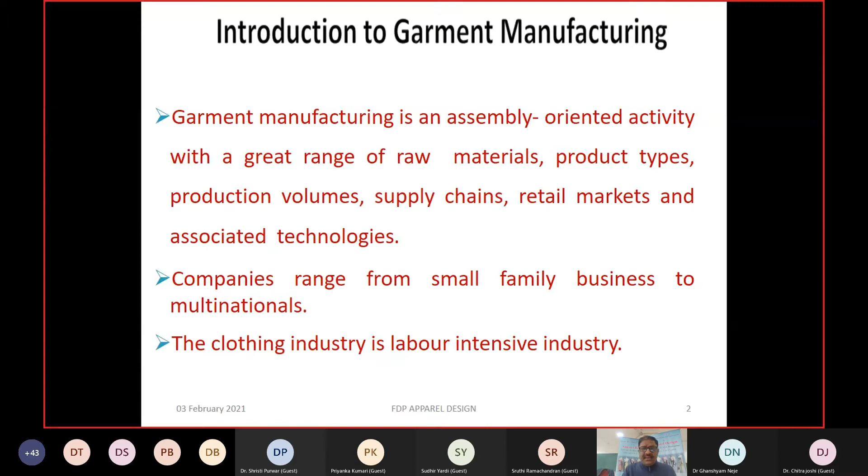So what is the quality network needed for the production of garments? First we need planning, meaning production planning and control - planning the production and setting objectives and improvement plans.

Then you implement all the planning, establishing world-class practices and technology for production. Checking means keeping control points and inspection points during manufacturing - this is the monitoring of the product. Based on this experience, especially inspection and quality checking and assurance, you get feedback from this section.

Accordingly you take corrective action - this is called ACT. ACT is the remedial approach for any faults generated in the undesirable products or manufacturing steps going on. So you keep an eye on all the manufacturing processes. Planning, implementing, checking, and applying corrective action - these are the 4 arms of this quality assurance network.

Now let's come to the quality objective. What should be the quality objective? What would be the quality objectives to follow during manufacturing?

Meeting your specifications is first - quality is already defined by your merchandiser, your consumer, your customer, your purchaser. So first you decide the quality, and this depends on the quality given by your buyer, your user, your brand. Then consistent quality must always be produced - reproducible quality as per the quality given by your consumers.

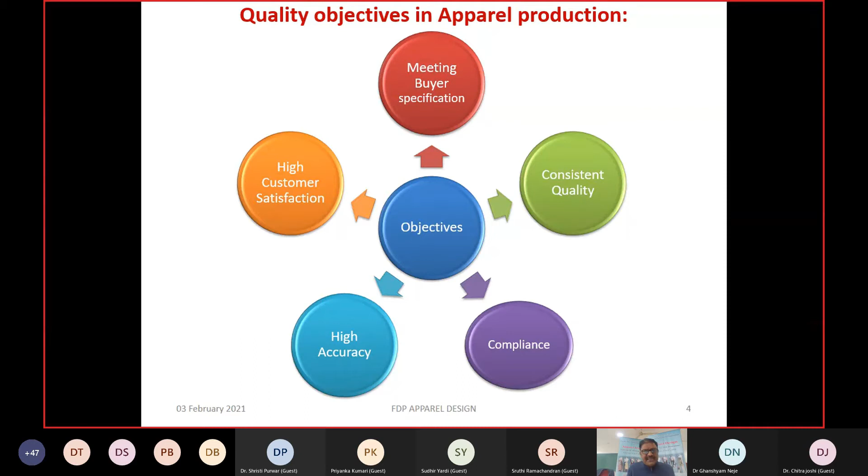So that is a very significant approach - especially how you provide more and more satisfaction to your consumer, to your users.

Quality assurance principle: first is fit for the purpose, meaning totally 100% perfect as per the requirement, as per the desired property, as per the requirement of the consumers - suitable for intended purpose. Suppose the consumer purchases the garment for some specific use, it must perfectly, 100%, fulfill that intended purpose.

Second is right first time - repetition of the work should be avoided. Right first time means the work should not be repetitive during production. It means you always prefer the appropriate and right approach toward quality assurance.

So what is quality? Quality has been defined by so many researchers, scientists and professionals. But in garments you will find one part is design and another is the properties of the product. Design is the aesthetic approach of the product, and properties is the engineering approach - both together make the perfect product.

One is design, meaning aesthetics, which satisfies psychological comfort, and properties of the product which satisfy physiological comfort. The consumer always needs that it looks good and at the same time provides all the required properties.

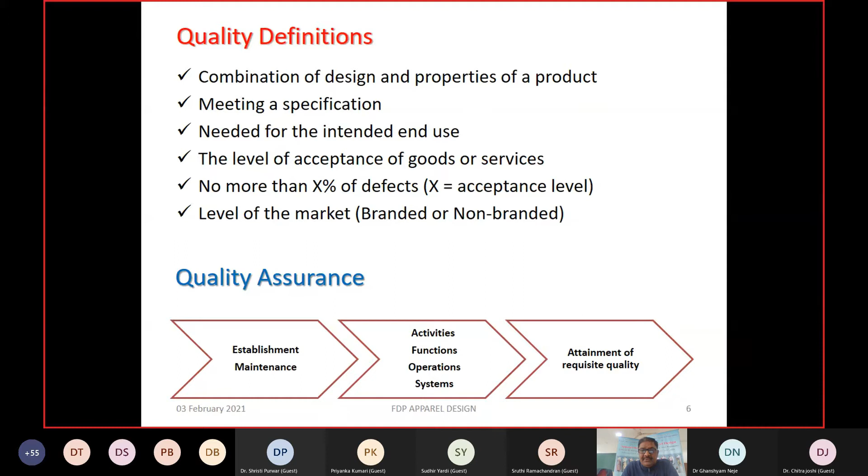So next is quality control. What is the role of quality control during production, during designing, during every activity of the garments? It is the system required for programming and coordinating.

Quality control basically depends on these programs. What would be the programs? What is your plan? This programming means the plan of your production. That's why the role of PPC, production planning control, is very significant in the garment industries. Always qualified and good people are hired for this PPC work.

Coordination between the cutting room, sewing room, finishing room, and dispatch, and with merchandiser, buyer, and seller - every coordination is required in order to reduce the lead time, reduce the cost, and maintain the quality.

So these are efforts of the various groups in an organization - the group work. All the people involved in various groups need to give maximum output while keeping coordination between all the groups. That will give a benefit to the organization and to the manufacturer in order to meet the quality and reduce the cost of the product.

So quality assurance serves as an agent to establish reliability. What would be the reliability of all your quality controls? What are the inputs? What corrective actions are you taking, and what are the results of that corrective action on the quality of the product? That is called reliability, and this reliability depends on your managerial skill, the skill of the labor, and the machinery used during production.

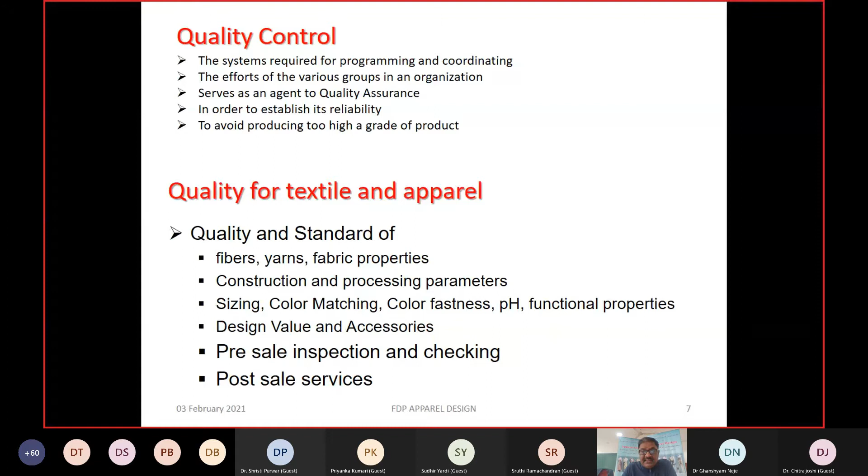All these are the policies of how to sell, how to enhance the sales of any product by any manufacturer. So, coming to the next slide, textile process sequence.

This slide provides basic information for non-textile people who have very little exposure to the manufacturing of textile materials. Fiber goes for spinning, making yarns, and yarn goes for weaving and knitting, making fabrics. The fabric then goes for processing, chemical processing, and then the final fabric is ready for garments.

With the help of suitable design, suitable fabric, suitable patterns, and desired trims - zippers, buttons, lining material, interlining materials, and other fusibles - suitable means desired or required trims, fabric, design, and patterns. All these four parameters make it possible to produce a complete, good quality garment.

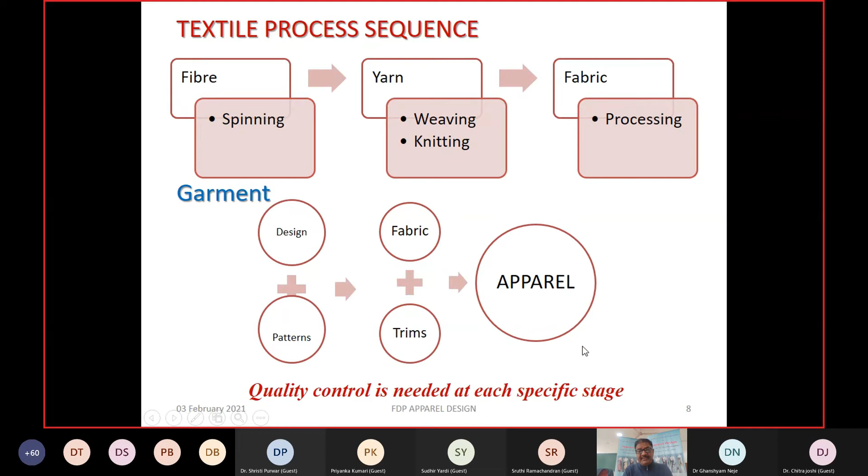Quality control is needed at each and every stage - the designing stage, the fabric stage, meaning good quality fabrics always give a good input to good quality apparel. Patterns mean good patterns, even patterns, and patterns as per the size of the garment. Trims mean good quality zippers, buttons, sewing thread, interlining material, tapes, and packing materials - good quality for every part of the garment. All these four inputs give an impact on the quality of apparel, so QC is needed at each and every stage of manufacturing.

This is also helpful to textile people, in contrast to the previous slide which was helpful to people with less exposure to apparel manufacturing. This is the production fabrication details of apparel.

There are two arms: one is planning, which is very significant in garment production, and at the same time quality assurance, keeping an eye on the whole production line. Planning is so significant because each and every lot is different from the previous lot - new design, new garment, new material is taken into account for production.

What machinery should be used for cutting the new fabric? What machinery should be used for stitching? What finishes should be used for the new product? This planning is needed for each different product and each different lot - every time we need separate planning for a separate product.

So PPC, production planning and control, is a very vital aspect of garment manufacturing, in order to maintain good quality garments. Accordingly, you design the work station, the methodology, time study, motion study, and everything.

That's why some companies recruit industrial engineers in the domain of garment manufacturing. They don't have an idea about the material, they don't have an idea about the quality of the apparel - they only have an idea about the planning.

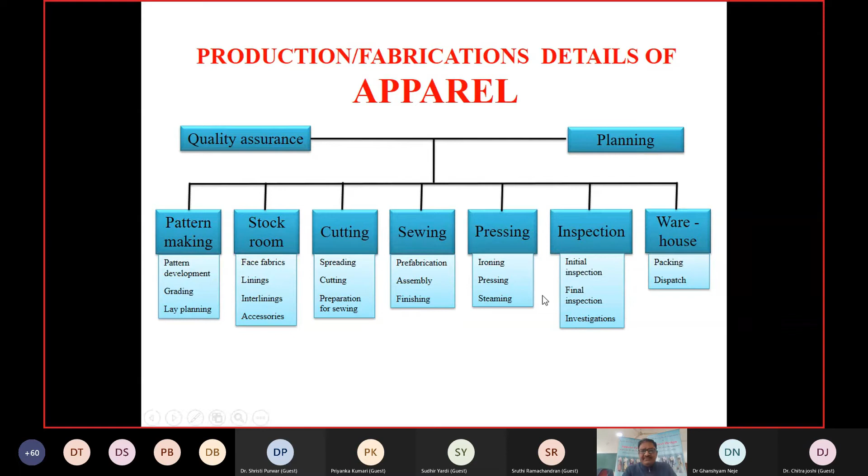Fabrication, joining - so anyway, this is the finishing. All these are the finishing operations.

Now to see the steps of this design: sketch, pattern, sample making, production pattern. Production pattern means pattern made for the production, actual size of the patterns. This will be used for the marking, and on the basis of that you cut the fabrics. Then grading, that is the step up and step down of the size.

This is done in order to avoid altering any aesthetics and design of the garments. So grading is a process of increasing the size - larger size and smaller size.

This is the marker planning. This facilitates this process of cutting, and also reduces the wastage. Spreading, that is making layers of the fabrics, and on top of the layers you put this marker planning. And this marker planning helps for the cutting tools.

Sorting and bundling means all the components cut during the cutting rooms, just offloading all the components from the cutting table, on the basis of orchestration of the processes going on in the sewing rooms. That is called sorting and bundling. We will discuss this in detail in coming slides.

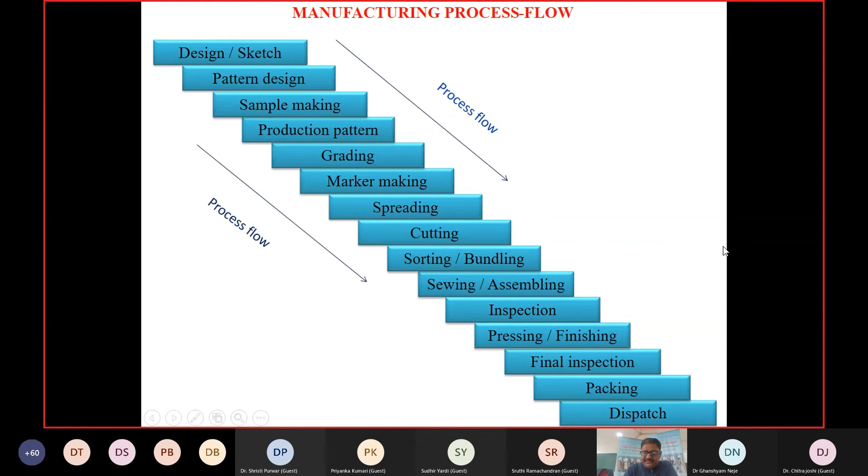Sewing and assembling - so sewing is like assembling, and then inspection, pressing and finishing, and final inspection, packing and dispatch. So anyway, inspection is one of two kinds of quality control in apparel production.

First is inspection, the visual examination or review of the material at different stages, and testing - determining the capability of an item to meet the requirements by subjecting that item to a set of physical, chemical, environmental or operating actions and conditions. So testing means the physical characterization of the product, like a final product, intermediate product, or raw material.

So in the apparel sector, they are supposed to do tests for yarn, fiber and fabrics, and that all depends on the textile testing instruments. For fiber testing, we already have so many instruments for testing the yarn and fiber quality in terms of length, fineness, everything. And we also have instruments for testing the quality of yarns in terms of single strength and CSP.

In terms of evenness and quality of the yarns, and also the more sensitive parameter of testing, that is the fabric testing. Fabric testing, especially the testing of the fabric for GSM testing, thickness meter and thickness test, and also pilling test, abrasion test, and permeability - water permeability, air permeability test - and also for deciding the wicking test, and for characterizing the fabric for thermal and hygral comforts.

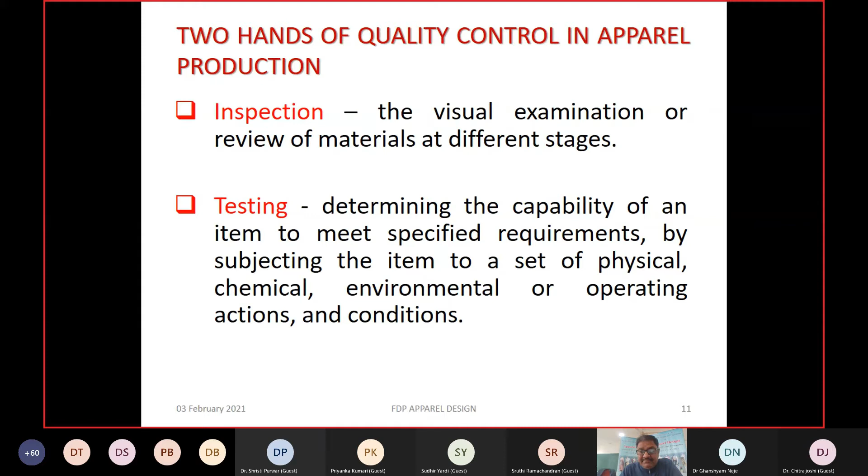Japan has developed this Kawabata system. Anyway, testing is the very initial backbone for deciding the quality of the garments, and the quality of the garments decides consumer satisfaction and every desired property of the apparels.

Quality control spans from raw material to the final product, and includes all the processes involved, whether for conversion of fiber to yarn and yarn to fabric, finishes used, manufacturing, stitching, cutting, and everything. So you have to keep an eye on all the processes in between the raw material and the final product.

In case of the fabric as raw material, what are the processes involved in converting this raw material, the 2D fabric, into a 3D fabric? That is cutting, spreading, marking, planning, stitching, finishing, and pressing.

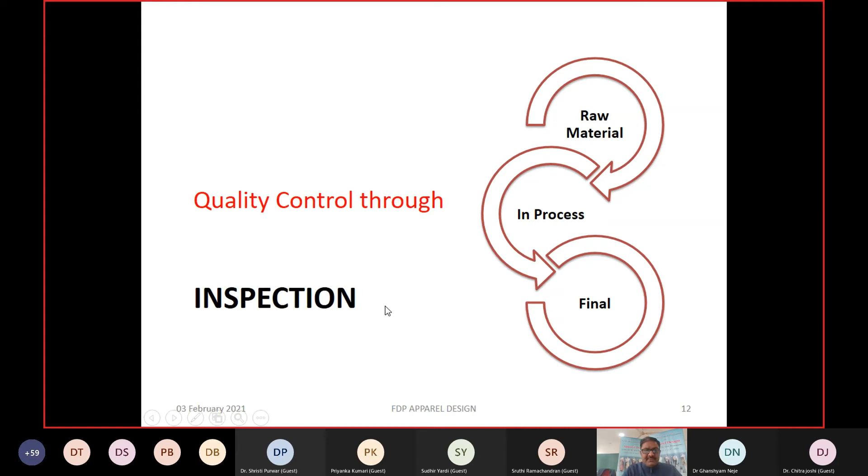So this is the objective of inspection. You can put an eye on each and every process of garment manufacturing, starting from the design studio, during pattern making, during marking and everything—detection of defects, detection of causes, feedback and corrections, and conformance, meaning just to meet the requirement as per the decided quality.

This is inspection and detection of defects, with feedback to the appropriate personnel for corrective action and determination of the causes of defects. This is very important—what are the reasons for defects, and how you can address and reduce those factors in order to avoid any kind of defect developed during cutting or during stitching. This is very important: how to determine the causes and how to address them during manufacturing.

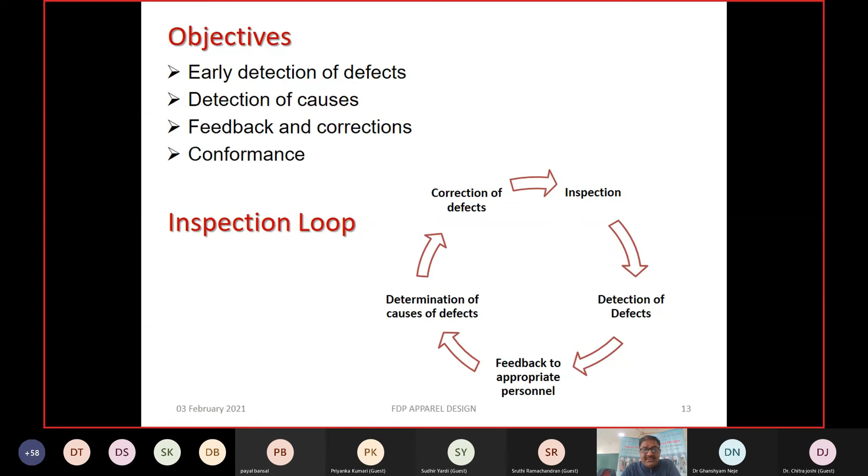In 100% examination, suppose your material passes, meaning the material totally fulfills the criteria of your buyer and is 100% defect free. If you check the garments and give them quality clearance through this 100% examination channel, it just ensures 100% good quality, defect-free garment product, a perfect product.

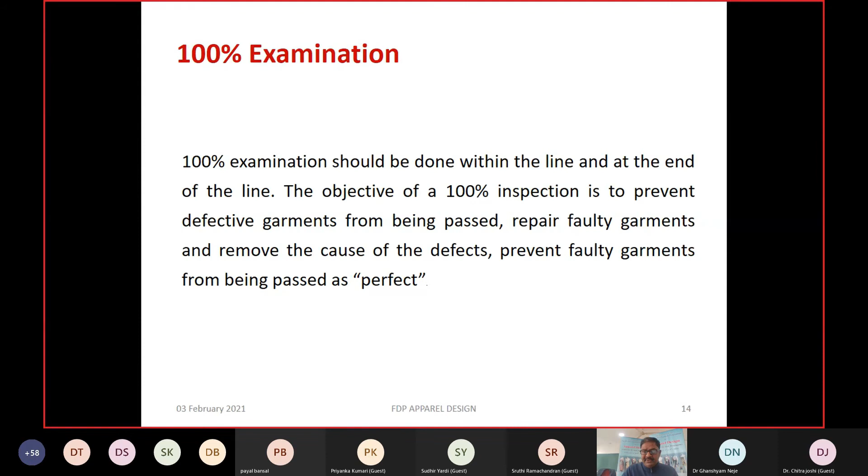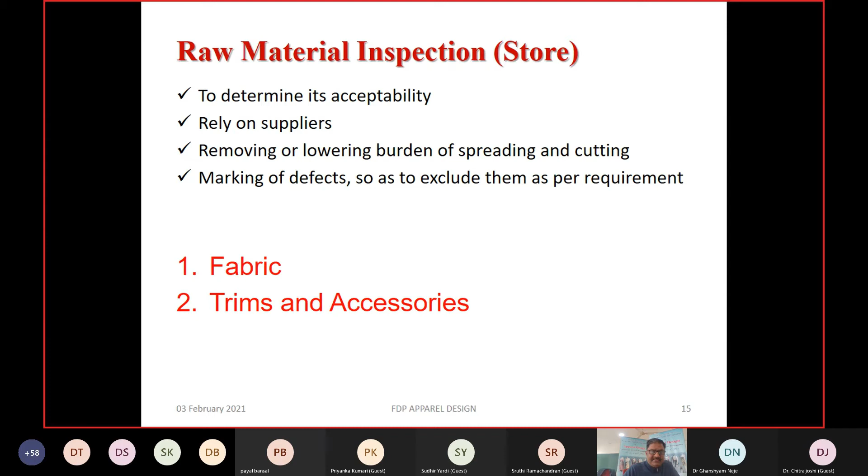So raw material inspection—I have already told earlier what is the role of raw material for the quality of the garment, to determine its acceptability. Here is the raw material, focusing on fabric. Rely on the suppliers, removing or lowering the burden of spreading and cutting, marking of defects so as to reduce and exclude them as required. So raw material inspection covers the fabric, and raw material inspection also covers trims and accessories.

Different types of fabrics—Dr. Kothari has already given an idea about these fabrics, the types of fabrics.

So there are many types of routes for manufacturing fabric: weaving, woven fabric, knitted fabric, tufting, braiding, lace making, net making, felting, non-woven products. All these are materials used in apparel for getting different quality parameters of the product, and we select the raw material, fabric, as per the requirement of the category of garments.

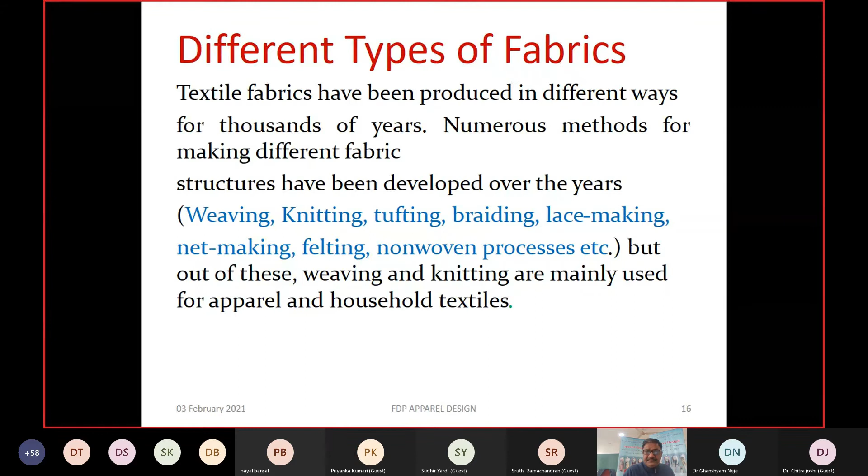So what are the components? Fiber, yarn, and fabric, already discussed in detail by Dr. Kothari.

So what are the key parameters required for a good inspector? Fabric inspector - each and every company, especially like Orient Craft, Shahi Export, any company involved in production of garments, apparel, high quality apparel, and also involved in export of apparels.

They keep a textile graduate, especially textile graduate. They also keep another hierarchy and a section for fabric purchasing and procurement. This section is responsible for purchasing fabrics from all over the Indian market - either the market of Surat or the market of Bhiwandi, market of Ludhiana, market of Calcutta, market of Ahmedabad.

They have all the idea about the material, they have all idea about the cost, they have all idea about the defects, and how they are able to optimize the cost and defect during the spreading, during the lay planning.

So knowledge of product, meaning fabric, that is the very basic requirement for a good inspector. Also knowledge of the production process flow - how to optimize the defect during manufacturing, how he can place the defect during manufacturing.

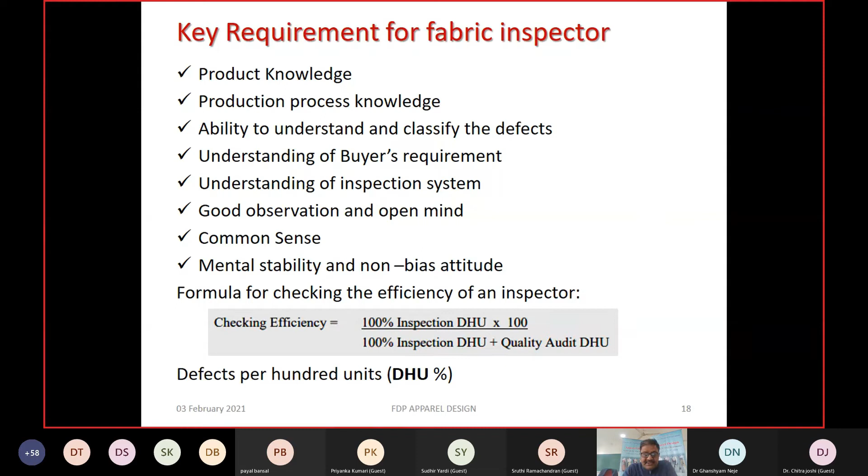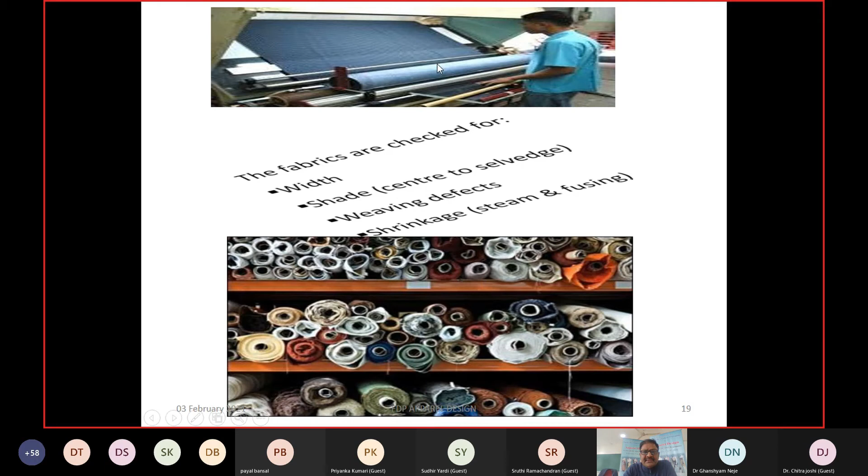So here you can see this instrument - this is the instrument, the fabric checking instrument. This fabric is checked by some operators for width and shade variation, weaving defects, and shrinkage defects. Here is the fabric roll - this is the fabric roll, meaning inventory, stock, and this is the machinery used for checking of the fabrics. So now let's come to the fabric inspection system.

There are two types of fabric inspection systems popular in India: the 4-point fabric inspection system and the 10-point fabric inspection system. The 4-point system is dedicatedly used for assessing the quality of knitted fabrics, while the 10-point system is used for deciding the quality of woven (open) fabrics.

Penalty points are given based on the size of the defect. If the defect is less than 3 inches, the penalty point is 1; between 3 to 6 inches, it's 2; between 6 to 9 inches, it's 3; and more than 9 inches, it's 4 - the maximum penalty point, since defects of 10, 12, 13, or 20 inches are totally unacceptable.

You put the fabric rolls on these inspection machines, and through this machine you take the dimensions of the defects. On the basis of the dimension of the defect, you give the penalty points. This is how the 4-point system assigns penalty points.

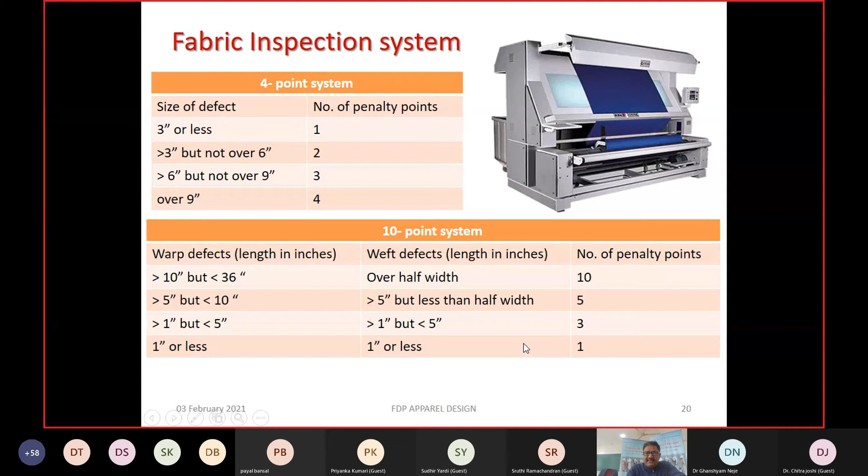Based on the penalty points, you calculate the points per 100 square yards. This is the total points scored, multiplied by 3600 - the width factor - and divided by the cloth width in inches, multiplied by the yards examined. For example, if you examine 50 yards, you put 50 here, and for cloth width of 44 inches or 56 inches, you put that value here.

Based on the points allotted as penalty for defects from the previous slides, you can calculate the points per 100 square yards. Suppose your manufacturer says only 50 points or below is acceptable - then you can reject the whole fabric roll based on this acceptance parameter given by your management.

A student asks what the 3600 factor in the formula means. The instructor explains that this is a constant used in the formula - you only need to put in the cloth width, yards examined, and the points allotted as penalty during inspection.

Here's an example: suppose you inspected 100 yards of fabric and got 100 penalty points, with fabric width of 72... that is, you calculate 100 multiplied by 3600, divided by 72 (the width), multiplied by 100 square yards examined. Using this formula you calculate the number of penalty points based on defects - the larger the number of penalty points, the larger these values will be.

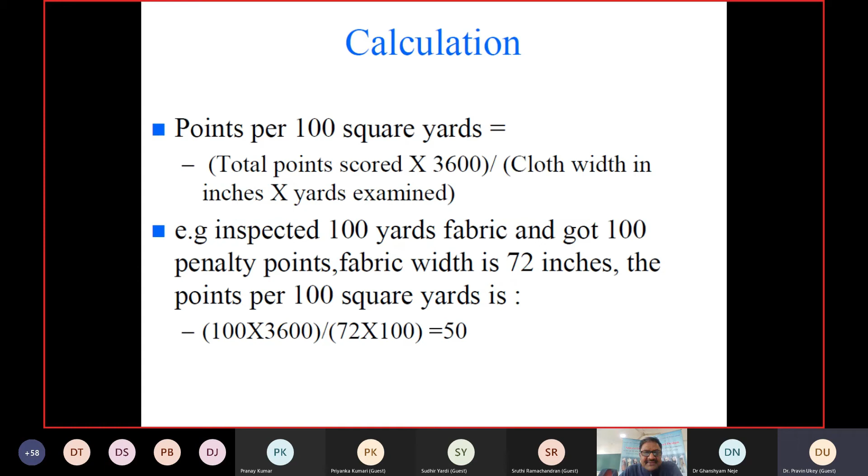These are the acceptable parameters in terms of EPI, PPI, warp and weft, and tolerance. The tolerance given for acceptance of raw materials and fiber content covers blend variation, such as 60-40, 70-30, 30-70, or 80-20. This variation in blends can only be characterized through fiber testing. This tolerance is provided by the buyer or manufacturer, or adopted for quality by your management.

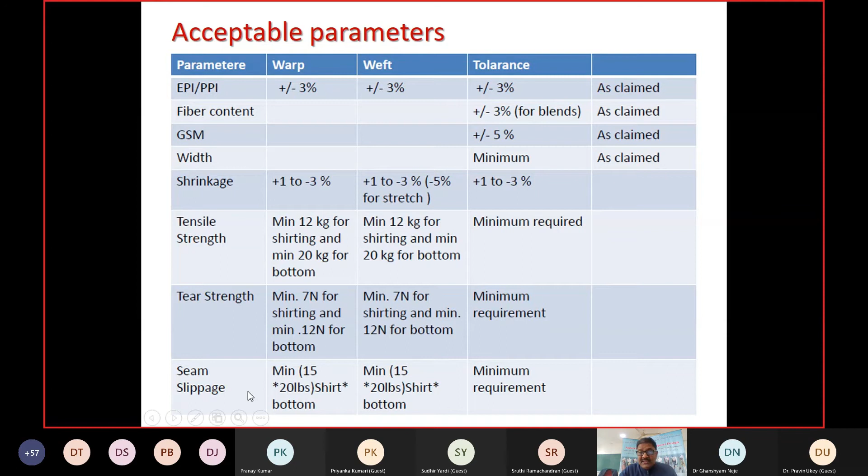Now let's come on to fabric usage controls.

The issue of material is the next aspect of this presentation. The details of individual batches are entered on cutting instructions, which authorizes the issue of fabric and provides essential information for spreading and cutting. So what would be the quality, the checkpoint, the philosophy, the approach to be taken during spreading, marking, and cutting?

It is to be ensured that the material is efficiently used. Efficiently used means lower the shrinkage, lower the wastage, and higher the realization of garments from the given fabric. Lower wastage means you are realizing more garments from the given fabric. Higher wastage contributes to more cost per garment.

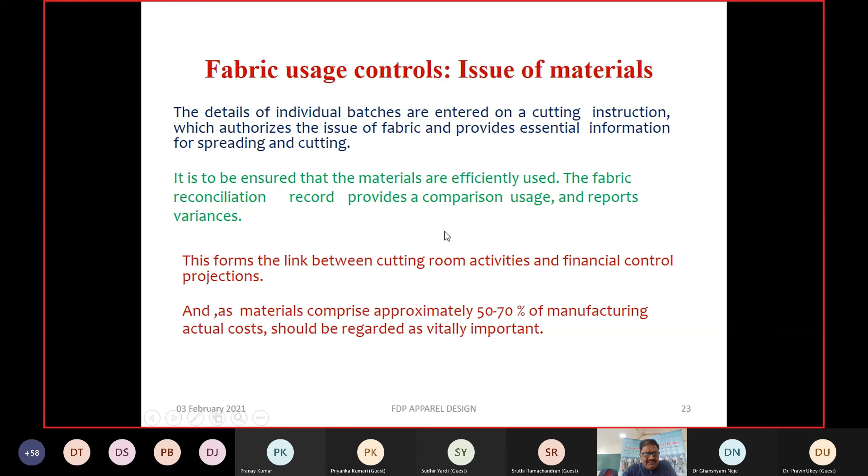The fabric reconciliation record provides a comparison of usage and reports - reconciliation in terms of the initial calculation during planning versus the actual meterage of fabric consumed during manufacturing, which can easily be compared. I would like to give some examples in the coming slides.

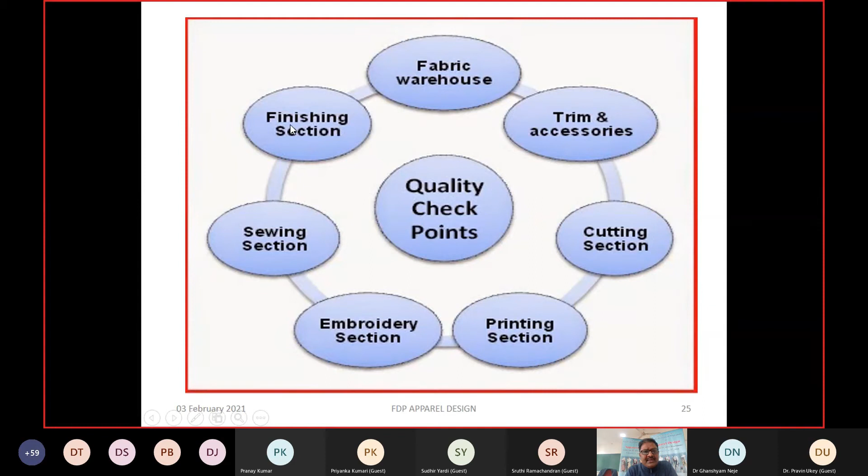In the sewing section, we keep an eye on the quality of stitching during manufacturing. Then there is the finishing section, which involves good quality pressing, cleaning of the garment, and packaging.

Now let's look at some technical processes involved in the manufacturing of garment apparel: the spreading and cutting flow process. First planning and spreading, then cutting, then preparation for sewing. This is the sequence. Spreading means just making layers.

Cutting is the cutting of the components as per the marking plan and your patterns. Then you make bundles, and you put some ticketing, which is called ticketing.

Tomorrow, Mr. Saurabh Chaturvedi will give detail about bundling, ticketing, and RFID technology, radio frequency identification, which is the latest technology used by the industries, the most modern advanced industries - CIM industries, computer integrated industries, in the apparel sector.

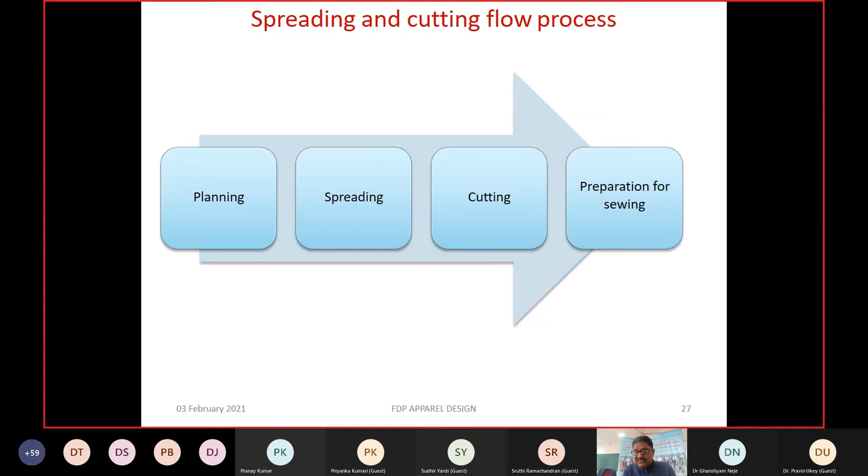They are using CAD, CAM, and all these sophisticated instruments with sophisticated networking of software through the networking of computers. RFID is the very latest technology, and he will discuss bundling, ticketing, and RFID technology in detail tomorrow at the first lecture.

So, the spreading and cutting process flow: this is the planning, that is the spread and markers and production. Spreading is done manually or by automatic machines having touch panels, and cutting by manual and machines. Manual means by hand, by simple scissors, or industrial scissors, and through machine the powered scissors.

And through rotary cutting tools, band knife cutting tools, straight knife cutting tools, laser jet cutting tools, plasma beam cutting tools, water jet cutting tools - there are so many mechanical and non-mechanical, automatic and non-automatic cutting tools used in the cutting of fabrics.

And now in the latest instances, they are using CNC, computer numeric control, over the size of the patterns, in order to avoid any variation in the components.

The next process is ticketing. Ticketing means putting identification marks on the components, and then making a bundle. That bundling depends on the workstation of the sewing room.

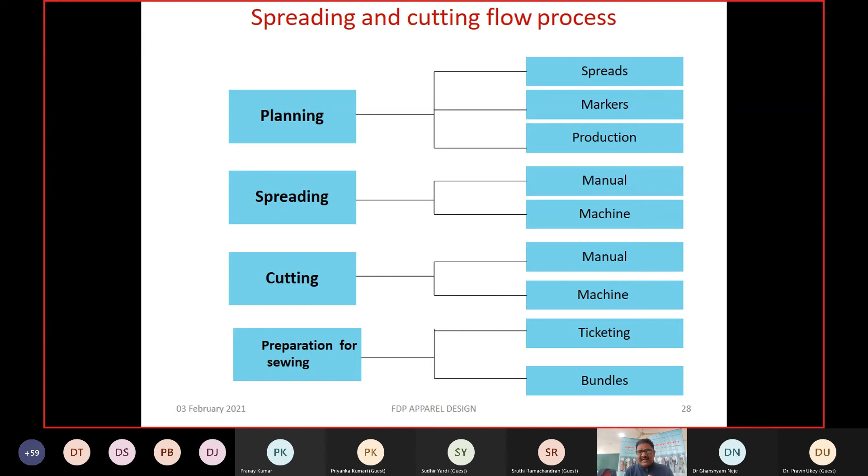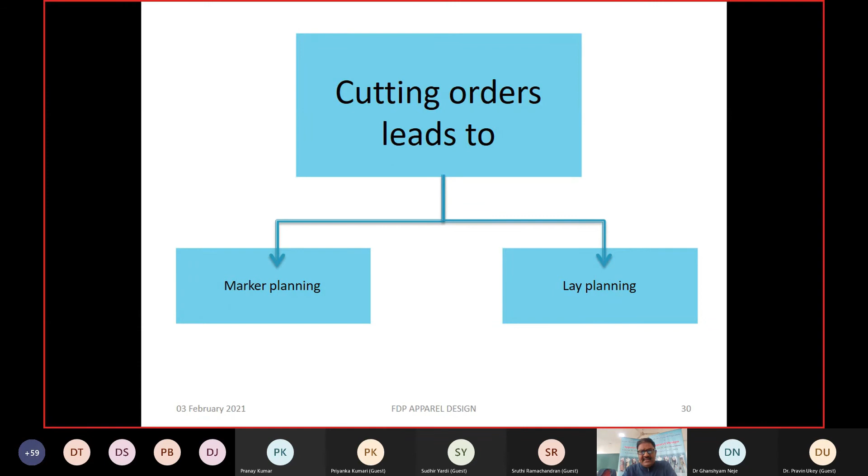The workstation of the sewing room is decided by your PPC professionals. So this is the planning, spread, marker and production. Cutting order leads to marker planning and lay planning. Marker planning is done manually, and also through CAD, computer-aided designing, with the help of CAD software and computerized marker making.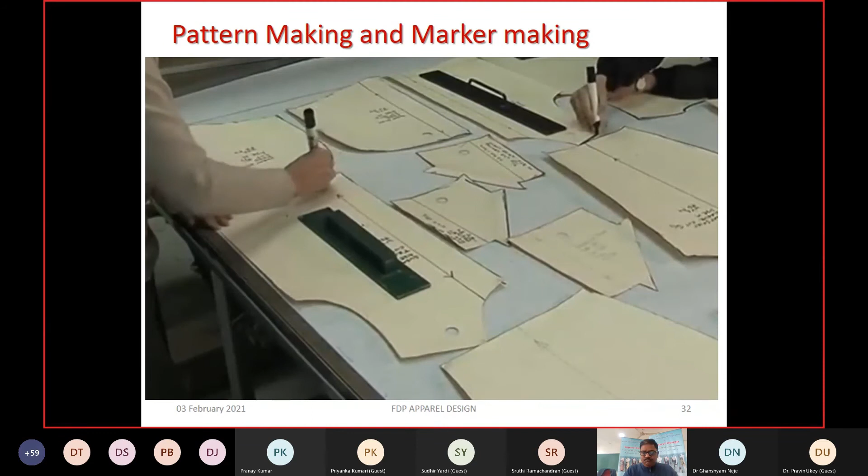Here you can also see this marking. Marking decides the maximum usage of the fabrics - the efficiency of usage, or realization of the fabrics. Here you can see there is waste fabric, this is counted as waste fabric.

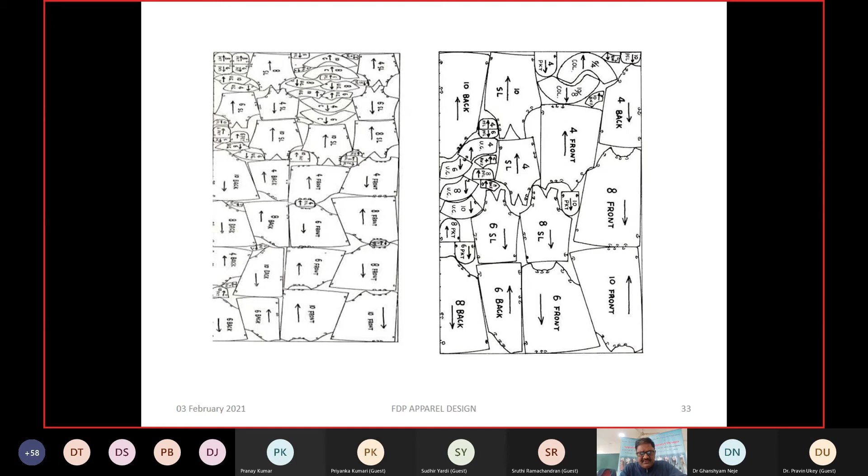How you plan the lay, how you use the lay planning, and what would be the size of the spread, will decide the maximum realization of the fabric. Over time we are using software for this objective - getting optimum maximum utilization of the fabric during marking.

So pattern making and marker making, what is the quality control approach needed during all the processes of pattern making and marker making? Maintaining buyer specification standard for the measurement. Measurement means fitness of the garments, size of the garments, fitness of the garments, maintaining the measurement.

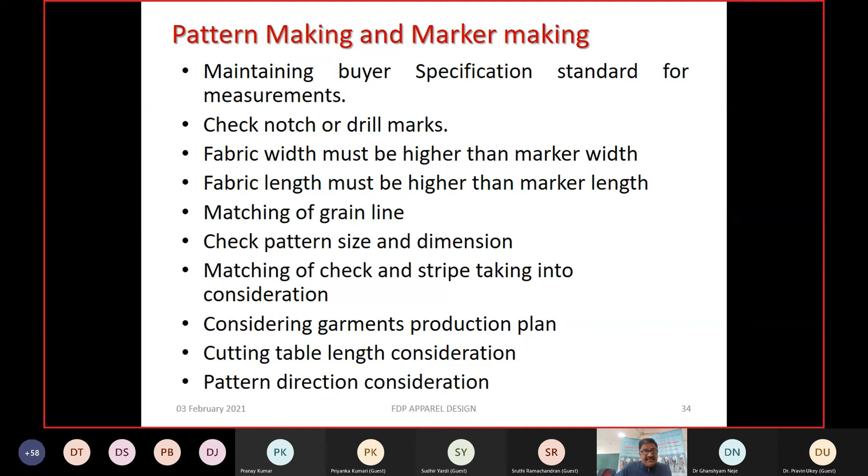Now we are using 3D technology for measurement of the human body. Recently Amazon purchased this size studio in order to avoid returning of garments. So the e-commerce market for apparel purchasing is going to increase by 30%.

Spreading is a very important process during manufacturing, because suppose you wish to make 1,000 or lakhs of garments. To achieve that number of garments we frequently need to make layers and layers, each with different motifs and designs.

Here you can see the design of the fabrics. Each and every layer should be perfectly superimposed on each other in order to maintain the requirements of spreading: matching of check and stripes and lay contains, correct number of fabric ply, correct ply direction, and control of fabric splicing and tension control.

Each and every layer of the spread must match the same design. Suppose you are using fabric having a certain motif - in the upper layer or lower layer, each and every layer must be matched and superimposed at the same place. Otherwise, during cutting, the motif and design would change.

Either in case of checks and stripes, or floral diagrams, or any pattern, any aesthetic pattern of the fabric, or texture of the fabric.

Third is the tension of each and every layer - that should be similar. No air should be entrapped between the layers, as that will increase the wear and tear of the cutting tools.

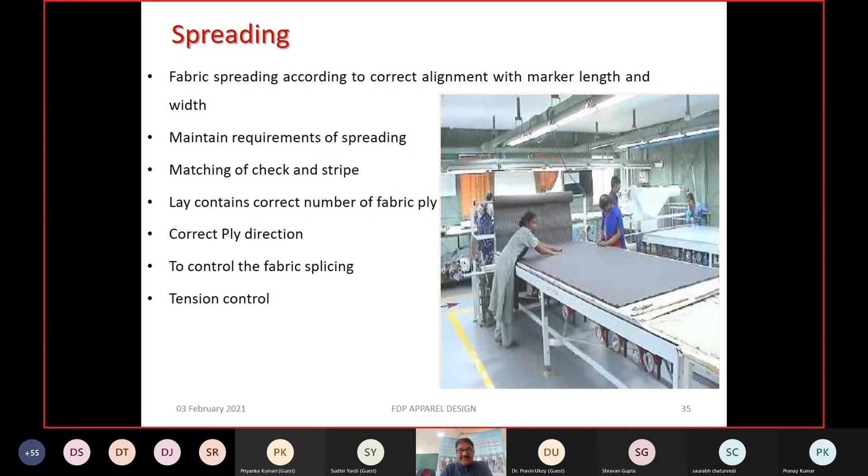There is also scope for how you place the defects in order to reduce the cost of production per garment. So spreading requires very technical knowledge and proper experience in order to decide the size of the spread and length of the spreads.

Here you can see the placement of the defects. They are just visualizing the defects of the fabrics.

Here you can see this one - this is face to face, this is face one way, this is nap in one way. This is the layer of fabric - first layer, second layer, third layer, fourth layer. This is the direction of the nap - this tells about the motif, design, and texture of the fabrics.

Here you can see just the opposite - nap is facing one to each other. Like a wire point in the carding or blow room, we use machinery with wire points facing each other, like that.

So there are four ways of presenting or using the nap of the fabric during spreading: nap one way and face one way spreading, nap either way and face to face spreading, nap one way and face to face spreading, and nap either way.

These are the four methodologies used during spreading. Spreading is a manufacturing process where you can optimize the defects, place the defects properly, and avoid generation of defective garments in terms of aesthetics. Especially you must take care of stripe effects and any floral or aesthetic waste in the fabrics.

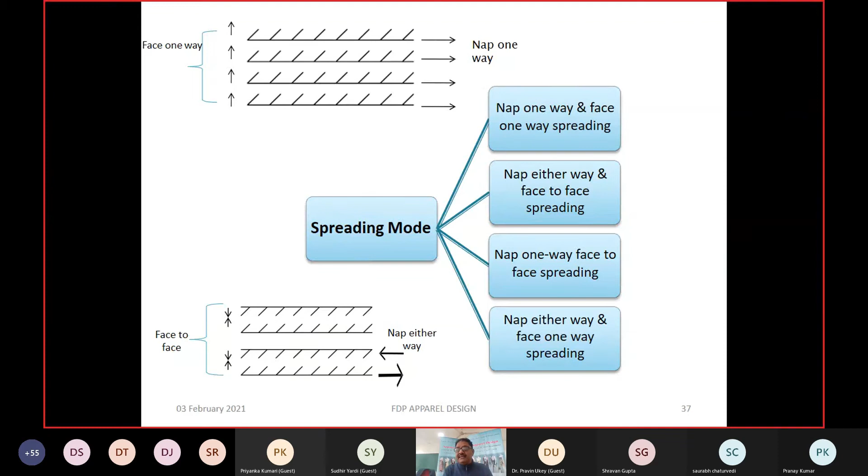Now, for cutting - the dimension of the patterns and the cut pieces should be the same and accurate, meaning across the cutting, all the cutting layers must match.

Just look at this - this is the cutting. Here is a view of the cutting tools, here is the fabric, this is the cutting table, this is the spreading, and here you can see it moving in the clockwise direction. This is the fabric roll, coming onto the spreading table for spreading, and then these are the cutting tools.

This runs across the layers - you can see the number of layers, more than 150 layers, and how this straight knife cutting machine runs across all the layers. This is the marker plan given on the top layer. Here is the person performing the exact cutting of the patterns, starting from left to right in the clockwise direction.

So anyway, what would be the quality of the patterns cut? The cut should be smooth.

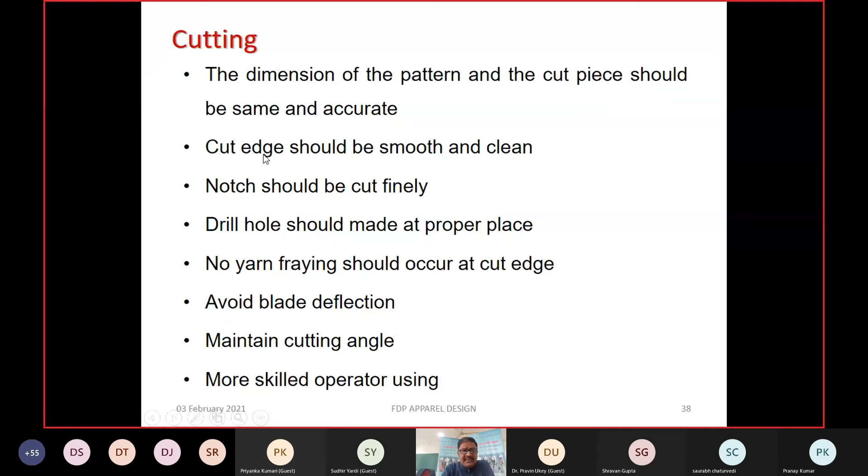So here we are facing what would be the size of all the patterns. Here you can see the size of the first layer and size of the last layer. That should be the same. This is the requirement: the size of each and every layer just needs to be identical.

Suppose there's wear and tear of the instrument and the floppy nature of the layers, meaning some cushion-like situation is created during cutting, and some air gets entrapped between the layers. That's why we use the suction table, air suction table, which continuously removes air entrapped between the layers. This also helps avoid wear and tear of the number of layers on the cutting table, especially during cutting, because the material is stationary and the tool is moving.

So how can you keep the material intact on the table? This is the question. Wear and tear of the layers can cause problems toward the size of the layers, and that is called notched cutting. Another problem faced during cutting, especially of synthetic fabrics, is that the blades of the cutting tool get heated over time, and heated blades cause melting at the side and edge of the fibers, which causes all the layers to adhere together.

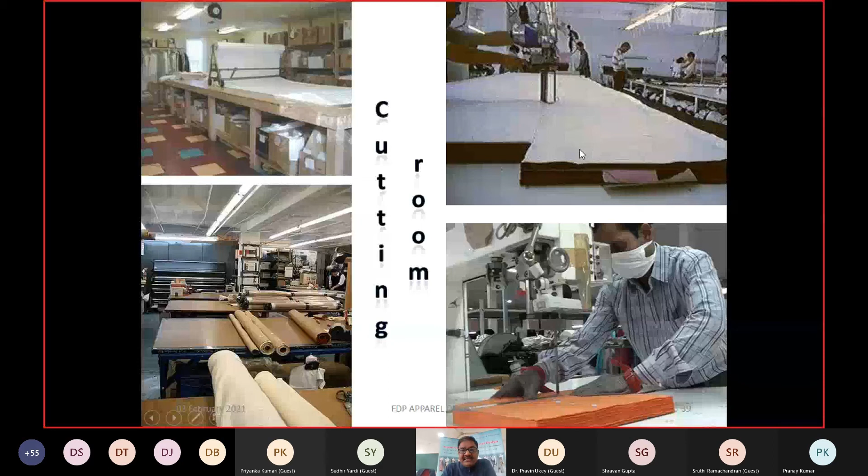There are many cutting technologies and cutting machinery used in the apparel industry. One is manual scissors, used by tailors. Then there are portable cutting knives through the machine, such as straight knife and round knife cutting machines. There are also stationary cutting machines like band knife, die cutting, servo cutting, plasma cutting, water jet cutting, and laser cutting.

Nowadays you may know that laser and plasma are also used by doctors for surgery operations. The same technology used for cutting flesh is also used for cutting fabrics - very accurate, very exact, very precise patterns can be cut with this technology, but the cost of the tool is very high.

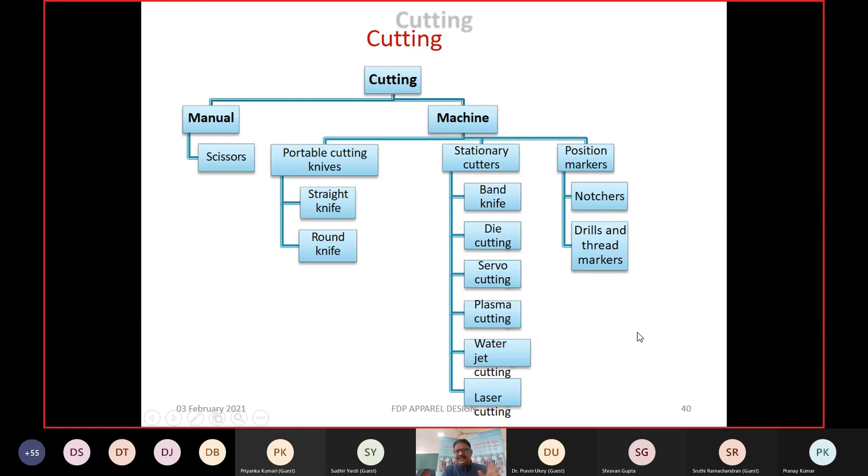And the notcher makes notches, and drills are made for the die, through the die. That is called prefabricated cutting tools.

So here you can see these two instruments: one is the band knife cutting machine, and here is the straight knife cutting machine. This machine has a low cost, around 25 to 30 thousand rupees. We have already purchased one for our lab, and the cost of the other instrument is around 2 lakhs rupees. But sharp corners and pointed patterns can only be cut by this instrument.

And you can use this instrument for more than 100 layers. But this instrument is not able to cut sharp or pointed corners, and you can only cut up to a maximum of 20 to 25 number of layers.

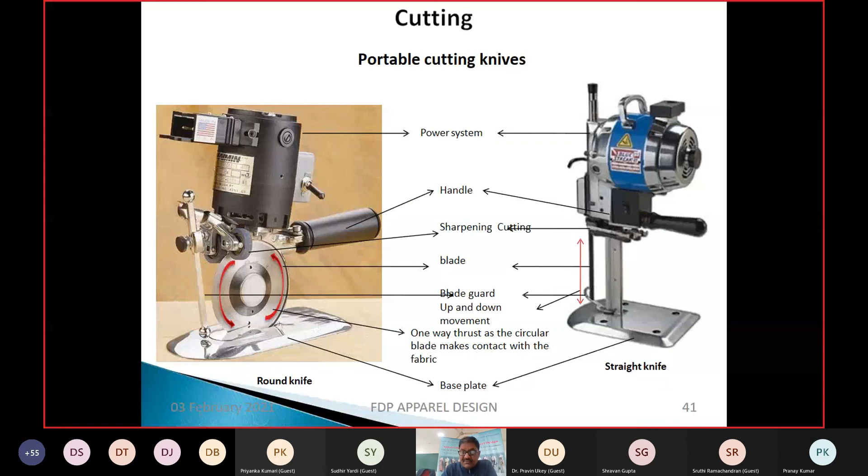Anyway, here you can see the performance of the straight knife cutting machines, meaning the working of the straight knife cutting machine. Here is the layer, here is the straight knife cutting machine. This is the widely used instrument for cutting in India, the straight knife cutting tool. But the problem is this is not accepted, because they are using their hands without any gloves.

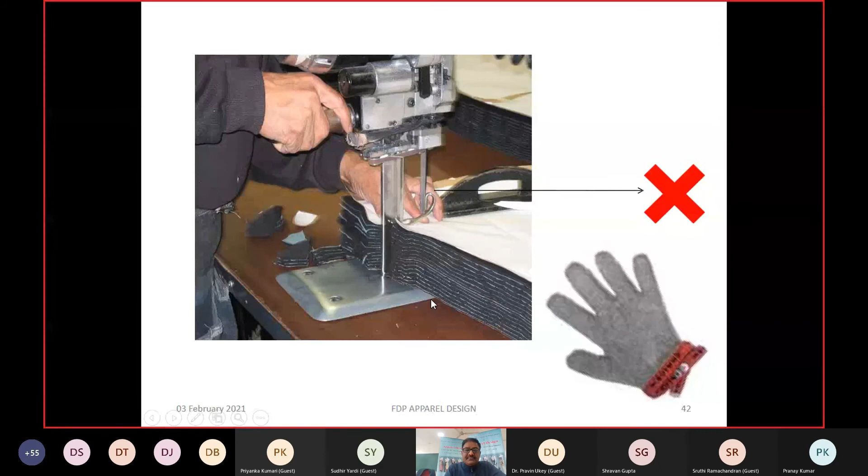So anyway, here you can see the person involved in cutting using the same cutting tools, but having metallic gloves in order to avoid any cut or injury on the hand or finger.

Cutting instruction is the main documentary output of the cut order planning process. It is known by a variety of names in the industry: cutting order, cutting sheet, and lay sheet. The cutting instruction must have the following information: fabric to be processed and cut, marker to be used, and number of plies authorized or equivalent.

This instruction, the cutting sheet, is very important in order to avoid the cutting of another fabric. We planned that fabric X needs to be cut, but fabric Y got cut instead.

So you are the person involved in the production of apparel in the group, meaning mornings, evenings - the industry works 24/7 in 3 shifts. So how do you use the logbook, how do you use it for this documentary proof and documentary criteria, and documentary communication to each and every person, each and every shift in-charge and supervisor.

That's why good industries get recognition through ISO 9000, ISO 9001 and 2, for documentation. Based on the documentation, they use the right documentation, good documentation, and this documentation may also avoid any kind of mixing of materials or wastage of materials.

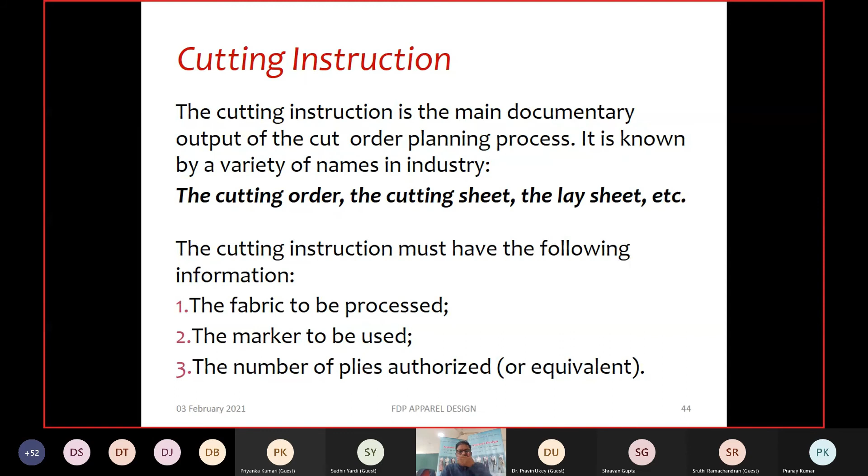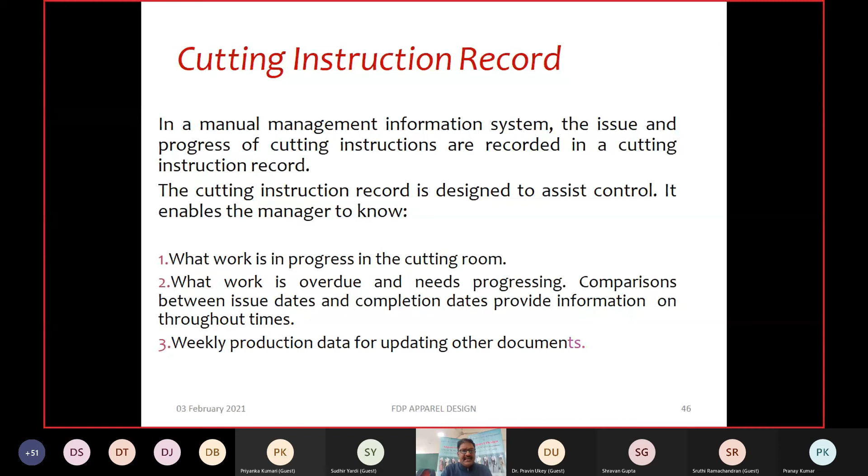For the sewing, there are two processes involved in this preparation: ticketing and bundling. Ticketing is a process to put marks on the components and give some identification marks on the component. Now we are using RFID technology. Initially it was done just by pencil, then by a ticketing instrument, then by putting some chip, and now we are using the chip in RFID technology.

Bundling totally depends on the workstation, the design of the workstation, meaning sewing room planning. So anyway, just to see, here the bundling is going on, here you can see the bundling is going on. These are the bundles made for the sewing room. Here you can see the person involved in the sewing room, here you can see the person involved in bundling. So bundling is done as per the type of garment, as per the planning of the sewing room. Here you can also see the rack and tray for putting the bundles, especially these bundles.

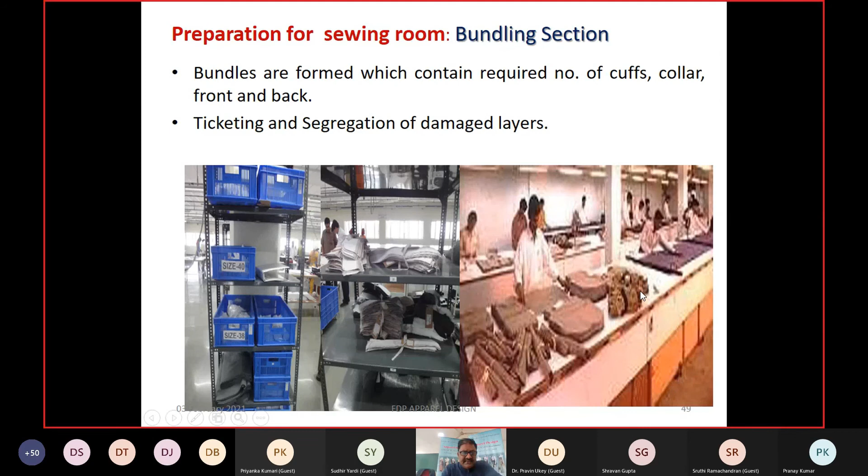Anyway, come on, the people involved again in cutting and bundling. Here you can see, it will take a little time to view because the color is not different. This is the patterns, layer of patterns. Here the person is involved, this is the instrument they are using for ticketing.

They are using the same instrument they use for ticketing, meaning putting some ID and some codes on the parts in order to avoid any kind of mixing of the patterns. Because you are making denim garments of 4 sizes using the same color and the same fabrics.

So how do we avoid mixing up or mismatching these patterns to the product? If even one wrong piece gets attached, that will create hard waste, defective garments. So bundling and ticketing is the systematic process to be adopted in order to avoid any mismatching.

So at the supervision level, we have instruction and control through the serial number of the entire bundle ticket, the name of the subsection such as sleeve, collar, front etc., style number, cutting order number, or spreading ticket numbers. All these numbers are given to avoid any kind of mixing, bad joining, or defective joining.

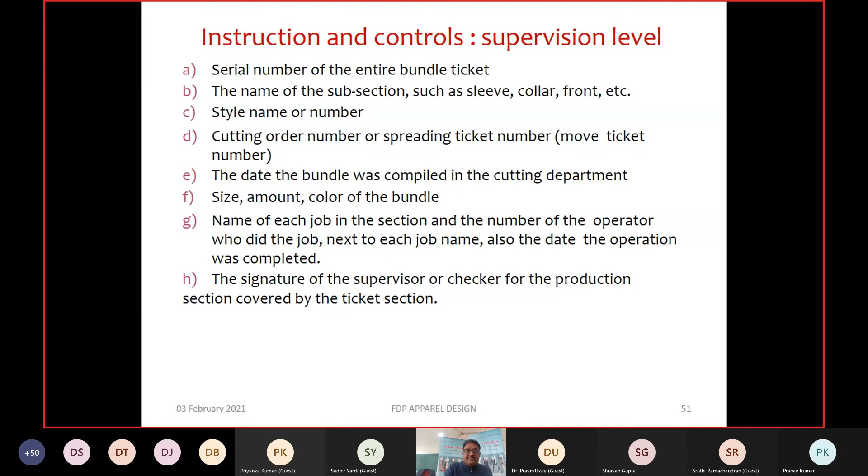So these are the instruction and control approaches taken at the supervisory and management level to avoid generation and production of defective garments. At the operator and subsection level, we have the name of the job, bundle ticket number, amount, size and color of the bundles, price of the jobs, style number, and every detail.

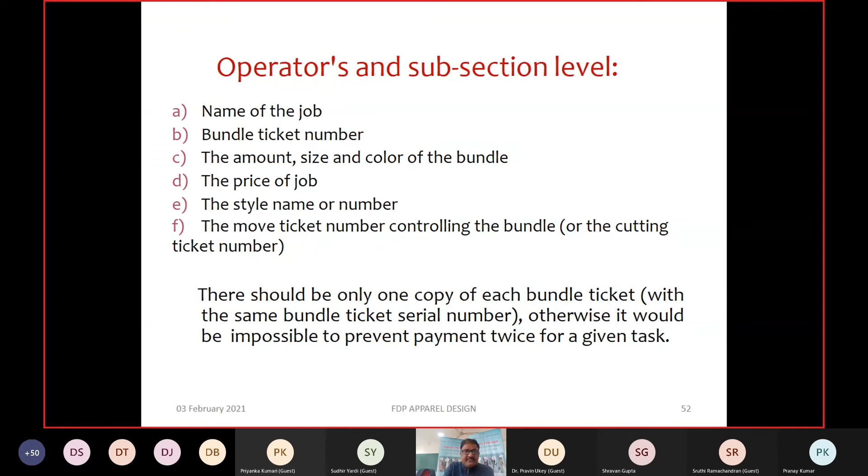Offloading is a process of removing the cut parts from the cutting table, counting, ticketing, and grouping items. Cut parts are considered work in progress, WIP. Lower the WIP means higher the productivity, and higher the WIP means lower the productivity.

Good inventory is also counted and tracked through the rest of the production process. This is usually done through bundle tickets that originate from the cutting orders. So all this bundling and ticketing depends on the cutting sheet.

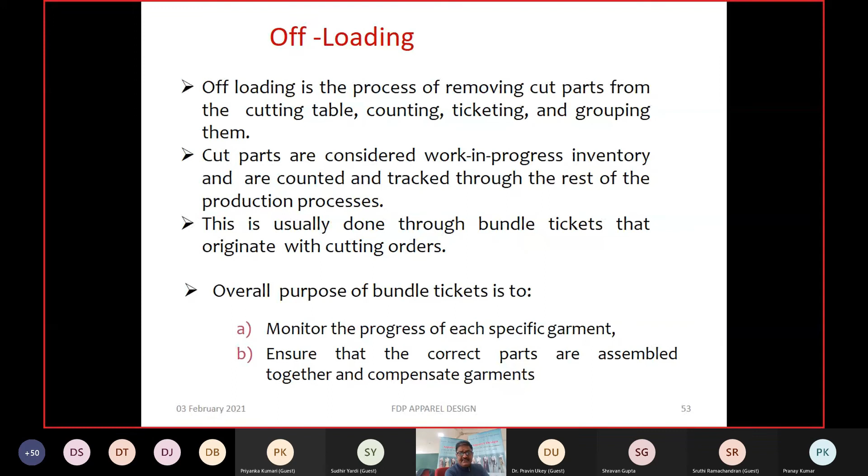The overall purpose and objective of this bundle ticket is to monitor the progress of each specific garment, ensuring that the correct parts are assembled during garment construction. Cut parts identification involves identifying and marking parts for further operations. These are the things related to control.

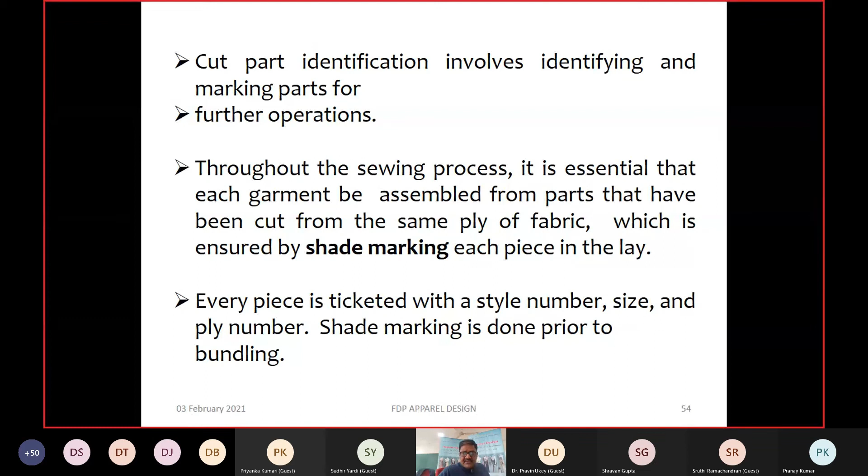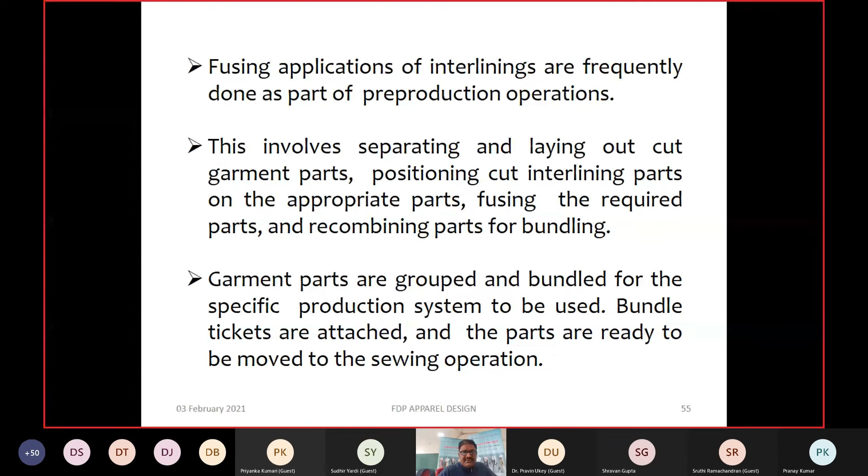Fusing application of interlinings is frequently done as part of the pre-production operation. This involves fabric usage control, fabric reconciliation meaning rate. Suppose the fabric rate is so and so, and fabric cost is 50 per meter.

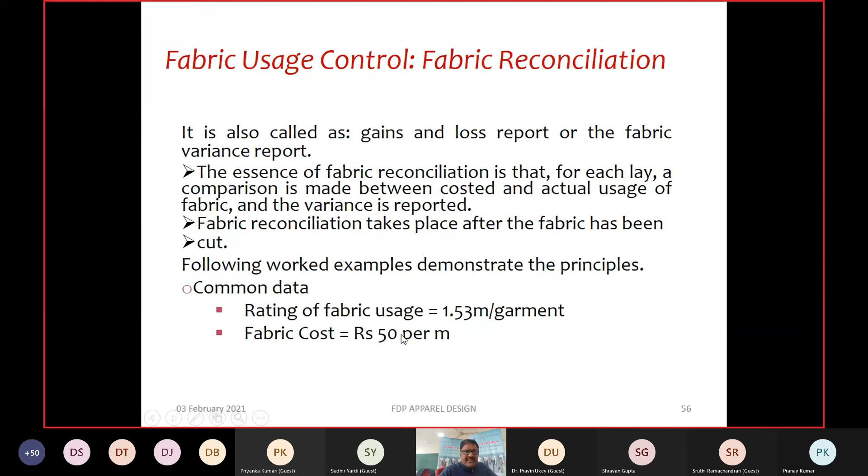So let's see one example - lay one means this kind of cutting planning, that is called lay 1, and one is lay 2. In lay 1, actual usage is 545 meters, and the number of garments cut is 360. So costed usage is 360 into 1.53, that is 550.8 meters. So theoretically, as per the planning, we needed 550.8 meters of fabric to cut 360 garments.

But actual usage, meaning fabric consumed during the cutting, is 545 meters. So what is the difference? 5.8 meters. At the rate of 50 rupees per meter, this 5.8 meters, almost 6 meters, means 300 rupees.

So actually you reduce the consumption of fabric during cutting by suitable, optimum approach taken during the cutting, especially during lay planning and spreading. So marking planning, lay planning and spreading will make it possible to reduce the wastage, and here you are saving 290 rupees.

And in case of this other lay plan, here is a loss of 200 rupees because you are using more fabric. Actual usage is 463 meters and the calculated costed usage is 459. So 4 meters more fabric was consumed for cutting 300 garments.

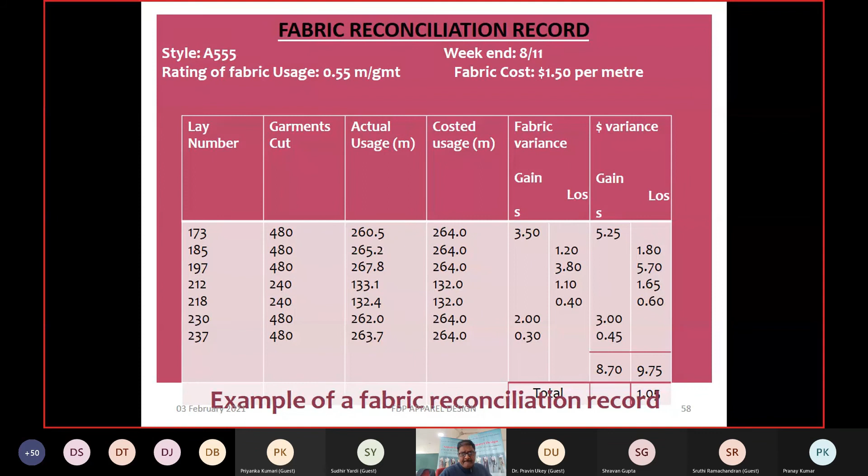Anyway, sewing room process flow. Here you can see the sewing room process flow, what are the processes to be done during the fabrication zone: sewing room planning, cut part receipt from the cutting room, and the bulk production begins.

This is the inline inspection, production continues. This is the end line checking of each and every joining, button hole, bar tacking, rough checking, ironing, then final checking, measurement checking means size checking, and tagging means installation of the tags, care symbols and all the symbols, packing, and then the quality audit.

Quality audit means the channel from which the material or final product is either passed or not passed, accepted or rejected. And then the ex-factory means the destination, movement of the consignment to the destination.

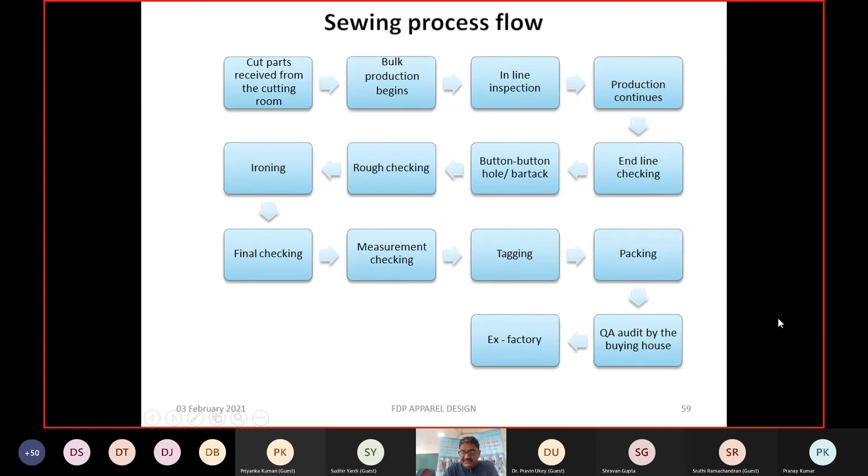Everybody knows the size of the needle depends on the size of the sewing thread, and the size of needle and size of sewing thread both depend on the GSM of the fabric. So GSM of fabric gives an idea about the selection of sewing thread and selection of the needles.

So any stitching fault should be checked, garment measurement should be checked, seam fault should be checked, size mistakes should be checked, mismatching of the trimming, shade variation within the cloth - that should also be checked. And wrong placement of the interlining and crease and wrinkle appearance controls.

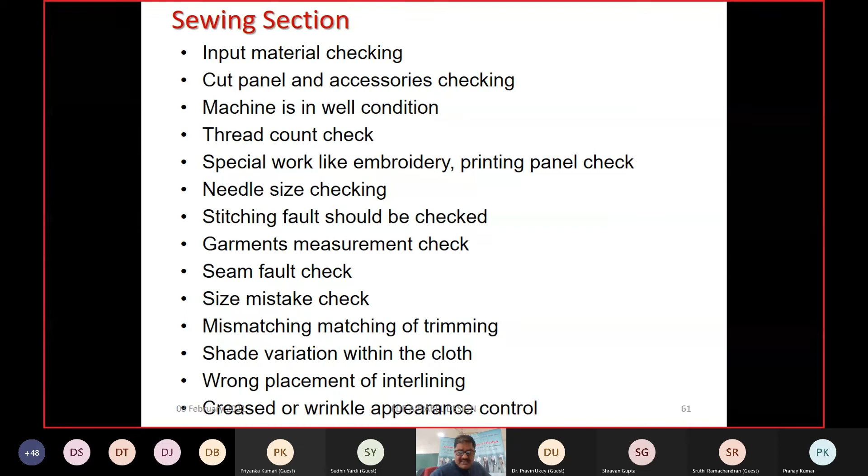Yesterday Dr. Midha already gave detail about this, how you control this and what are the causes of seam puckering and how you can control seam puckering during the fitting of the parts, components on the machine, over the machine.

So all these, I will send this presentation, you will just go into the detail of all the points given in check point 1, 2, 3 and 4.

Everybody knows what is this open seam, skipped stitches. There are so many reasons for skipped stitches due to the dynamics of the machine and due to the sewing thread. The more stiffer sewing thread you are using - suppose you are increasing the SPI, the more flexible and pliable sewing thread is needed.

So anyway, wrong stitching technique, non-matching threads, exposed seams - these are the defective seams. So how you control, how you reduce the chances of formation and generation of these defective seams by the optimum use of the machine and by just putting some eye on during the stitching.

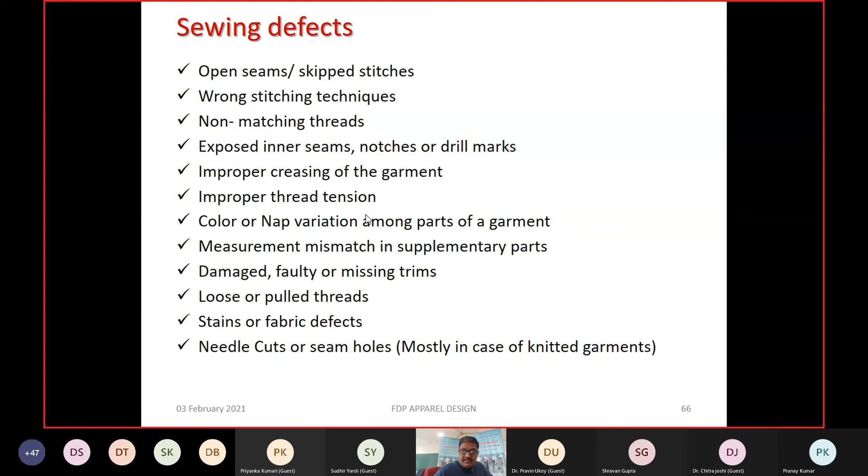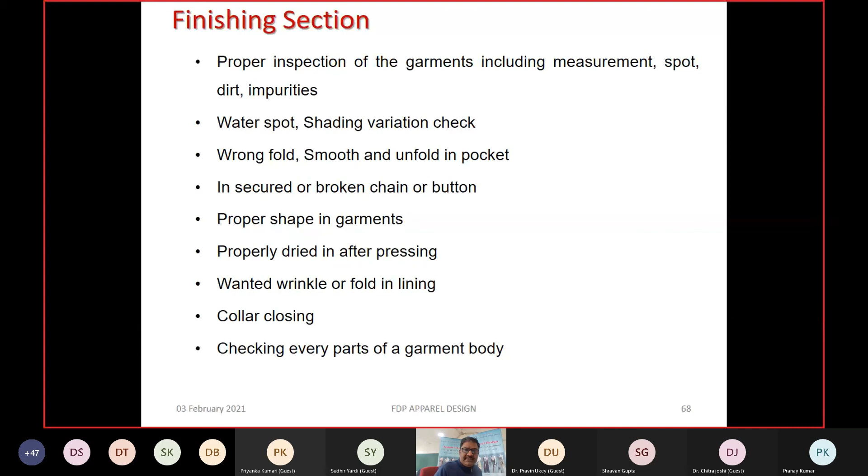This is the finishing regarding the water spot, shading and variation check, wrong fold, smooth and unfold in the pockets, and proper shape in the garment. So all these are just to see the details in the PPT. This is just to see the view of this. This is the take inventory. Now your cartons are made, packaging is done.

What would be the approach toward the random testing of your product garments? So randomly you select the cartons from the lots, from the dispatch sections, and randomly you take the cartons, open them, and from the carton you check the number of samples. So now in India, we are using BFI, Bureau Veritas, and SGS, having a head office at Gurgaon. These are multinational quality auditors. They recently opened an office at Ludhiana.

This is called third party inspection. No export house can send directly. After the buyer, the international buyer located outside your country, they only believe the report given by this third party inspection, third party quality auditor. So now this is one area where you can also get a job, especially as a quality auditor, textile garment quality auditor. So anyway, this is the way of sampling.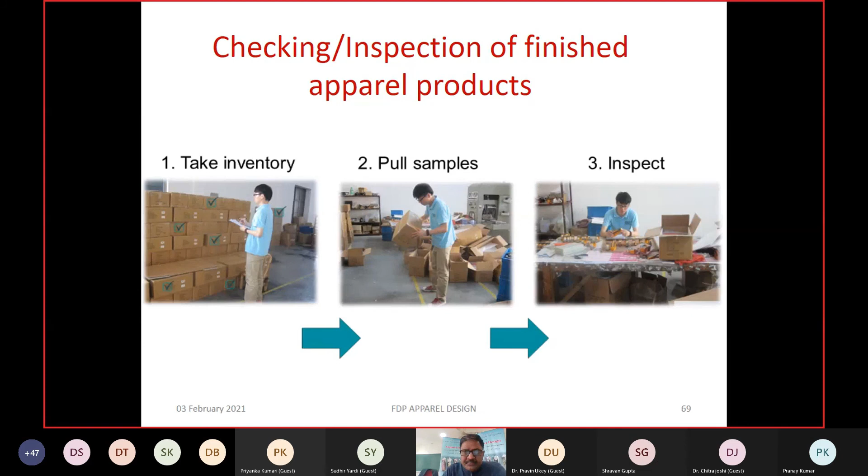So acceptable, as I mentioned before, what is this acceptable quality level, AQL. So it's a random inspection sampling system to make decisions on the acceptance of the shipment. The AQL level varies process to process, product to product, and even buyer to buyer. One buyer asks for 4%, another asks for 1%. 1% means very good quality, and 4%, 5% or 6% is very poor quality. So it's the maximum number of defective items that could be considered accepted during random sampling or inspection.

So garment exporters and apparel buyers use this AQL 2.5%. So normally in garments we are using, or our buyer prefers, this 2.5% acceptance level, AQL level. Here you can see critical must be 100% accurate, there is no range, and normally 2.5% in major and 4% in minor. These are the ranges of acceptance.

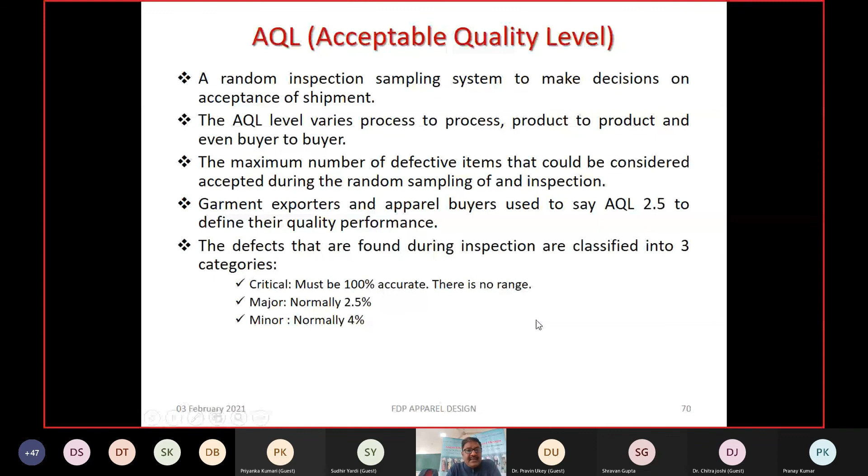Here you can see how you calculate this: average defective item equals number of defective items found during inspection divided by total number of items inspected, multiplied by 100, and this gives you the idea about average defective items. So the AQL process depends on the price and quality of the product. Lower the value, higher the quality; lower the value, higher the cost.

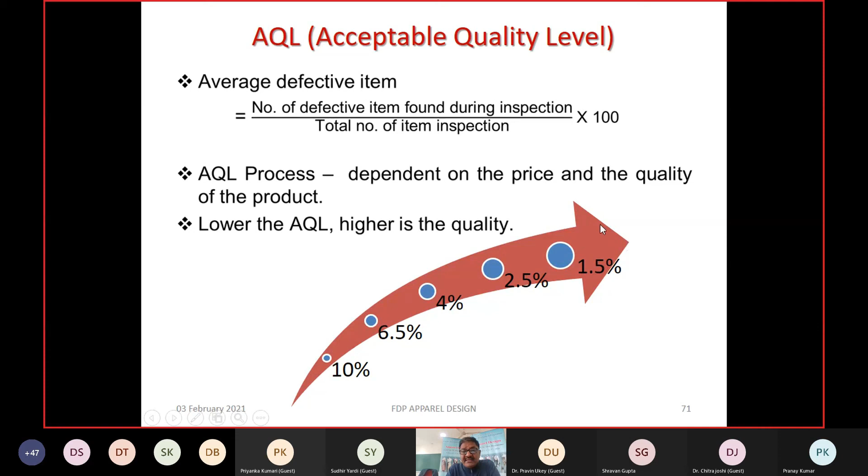So here you can see this 10%, 6.5%, 4%, 2.5%, 1.5%. This is high quality, that is poor quality. This is the cost of the garment as per this norm, which would be higher cost, incurring more expenses, more money in order to make such a range of garment, such a range of product. So anyway, here is this AQL table.

Suppose this is the lot or batch size. Here you can see, am I audible to all of you? Yes sir, I am audible, yes sir. So this is the lot or batch. AQL 2.5% means maximum average defective item is 2.5% in the lot, in the whole consignment, which is acceptable. Here you can see, suppose this is the yellow row, 91 to 150, that is the lot and batch size, and the code given is F, and sample size is 20.

We will take 20 from this, and suppose the defect is in the range of 1 or less than 1, then it remains at one, so the quality is accepted. Suppose the defect is more than 1, 2, 3, 4, 5, 6, and here you see this is 6.5%. In this case, what happens? The number of defects increases. Up to 3 you can accept, and more than 3 you can reject the whole lot through this random sampling, based on the 2.5% AQL level. Here you can see also, in the range of lot size is supposed to be 1200 to 3200.

The code is K, and the lot size or sample size is 125, up to 7 or 8 defects. In case of 8, the auditor will reject the whole lot on the basis of this number of defects.

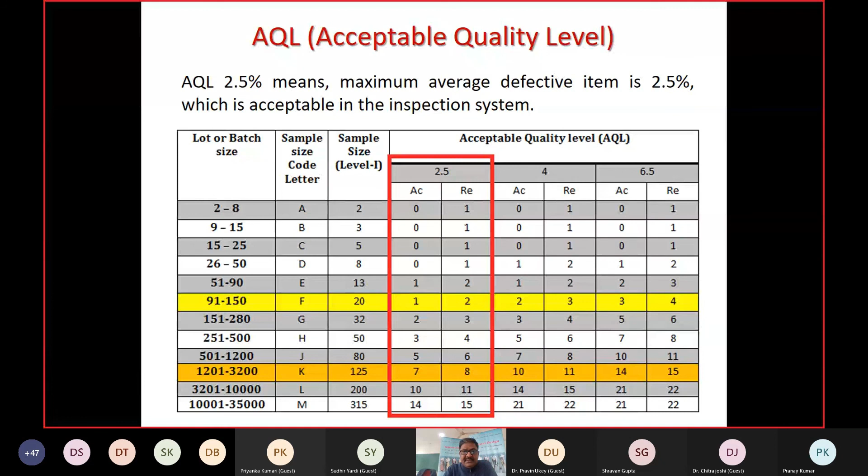So anyway, there are single, double, and triple sampling types. Normally single and double are used in garment sampling and testing for deciding the quality of the garments. These are some quality standards normally used for voluntary consensus standards and regulatory standards.

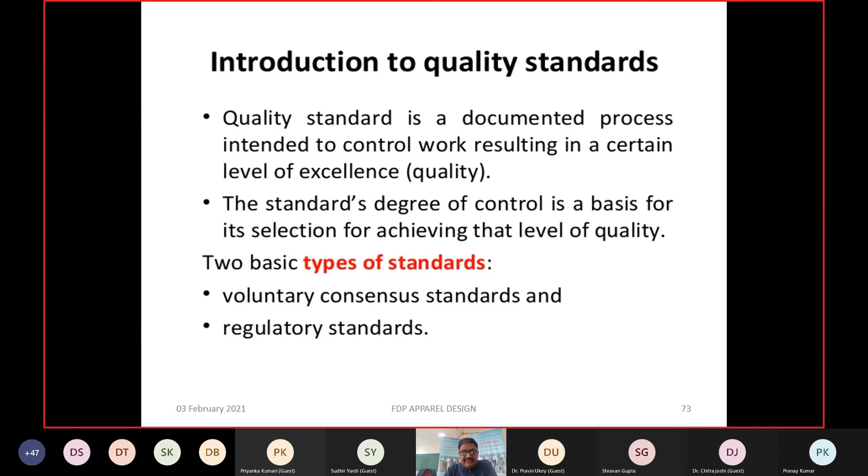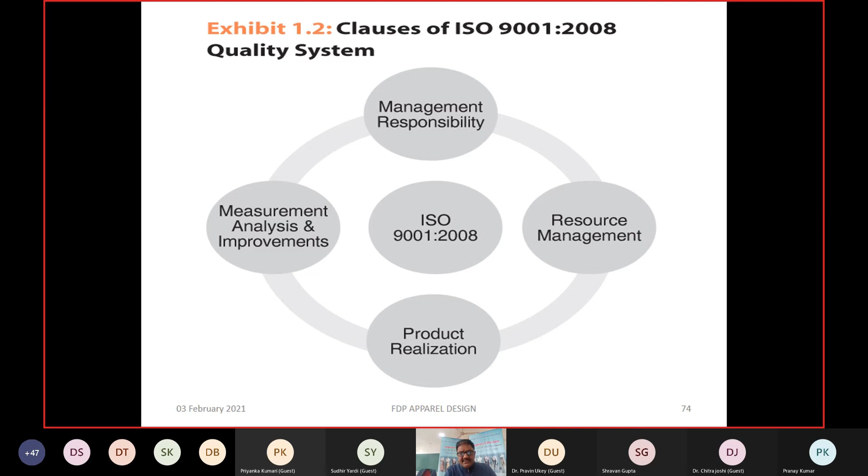It is not very clear here, but what is the role of the cost? Cost of the quality as a percentage of the sale. Many shops in the market run because of their good quality reputation. The shop is known for the good quality, the brand is known for good quality. So how does quality contribute toward the sale?

Initially, higher the quality, higher the cost. And every buyer believes in purchasing at the lower cost. But at the same time, the cost of the product depends on the quality. If you want good quality, you have to pay more money. So anyway, this is one way of marketing.

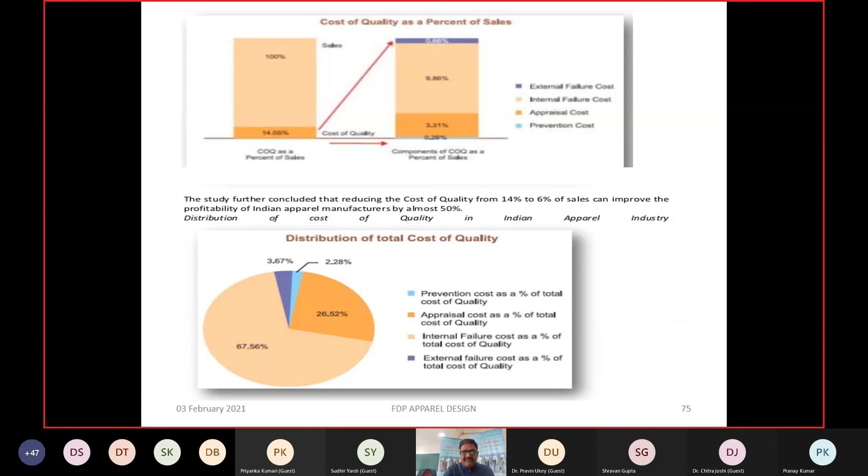When carpets go from India, US buyers ask about child labor involvement in the production of the product. They get certification from some NGO that the product is totally free from child labor involvement.